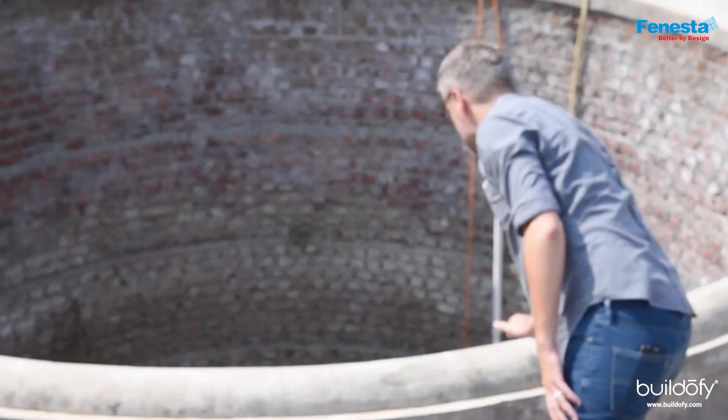One of the first decisions we made was to formalize that into an open well, not just something where we could take the spring water that was coming along, but also use that as a catchment. We implemented recharge pits throughout the site to help recharge the water table, and the more capacity we could build throughout the year to hold that water, the easier it would be on our resources.

We've actually been able to implement another massive rainwater harvesting pit that exists below the soccer field.

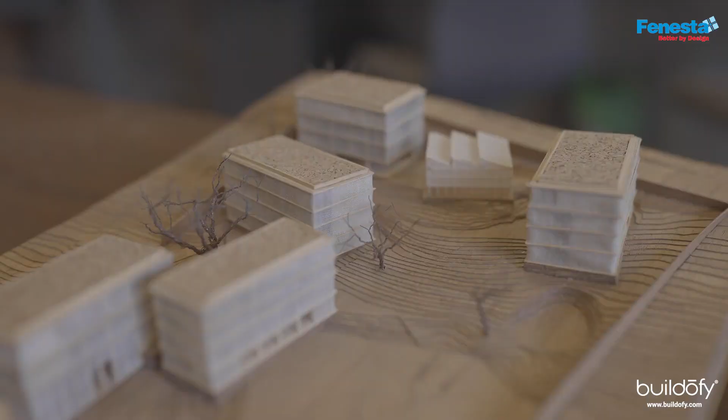What we worked out was a series of buildings that would sit, as much as possible, following the natural contours of the hill. The reason for that as well was to try and maintain as best we could the natural slope.

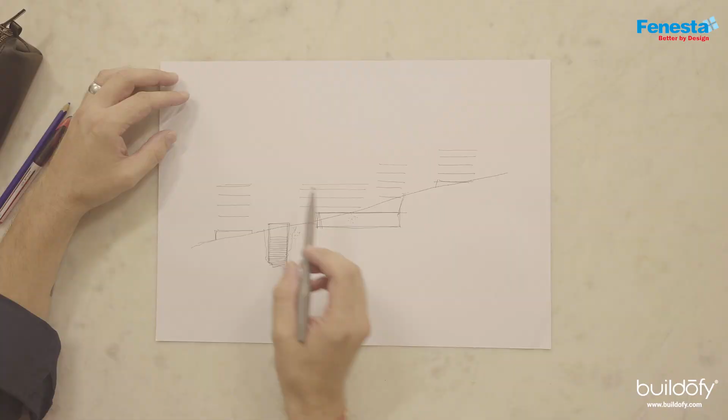Bedrock foundation of the site is fairly close to the surface, so any excavation that we had to do was quite expensive.

The aspirations that they wanted to accommodate greatly exceeded the FSI that we were allowed to build, where originally we'd planned for 9 buildings. When we took those for plan check, very quickly we were cut back to, okay, this is too much square footage, you have to take this out, you have to take this out. That's why we tried to look for ways to maximize what we could build in terms of how much of the verandas were counted in the FSI, outdoor spaces, double heights, things like that.

So there's dormitories, there's obviously washrooms, kitchen, cafeteria, things like that. And then the academic program, there's a library space that has sort of become this multi-purpose space. They play football there, they play badminton, they have poetry recitals and concerts.

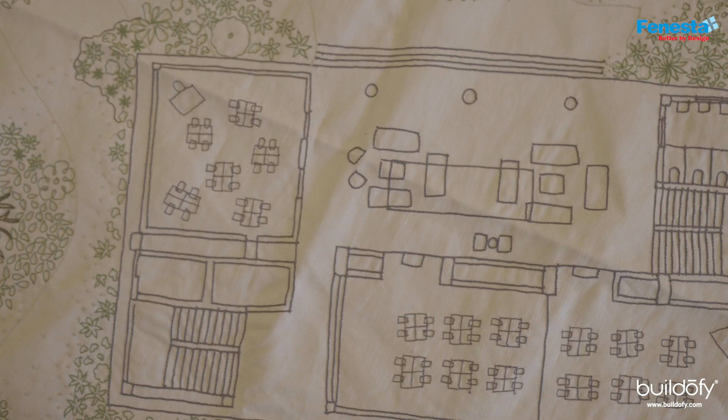The program, I don't want to say that it was conventional, but for us what was paramount was trying to maintain flexibility, to enable them to create a variety of spaces in terms of scale and function. If you imagine each of the classrooms as a cell, those are somewhat standard, but they were sort of infinitely reconfigurable.

On every building, the lower 2 floors are academic, and the upper 2 floors are residential. What we wanted to do throughout the campus was to have the dormitories and the classrooms be in every single building.

You have every part of the campus active at all times, so it's stratified vertically. A lot of the studies that we did found that the very typical campus plan is this is my residential zone over here and this is my academic zone over here, and that they never interact with each other.

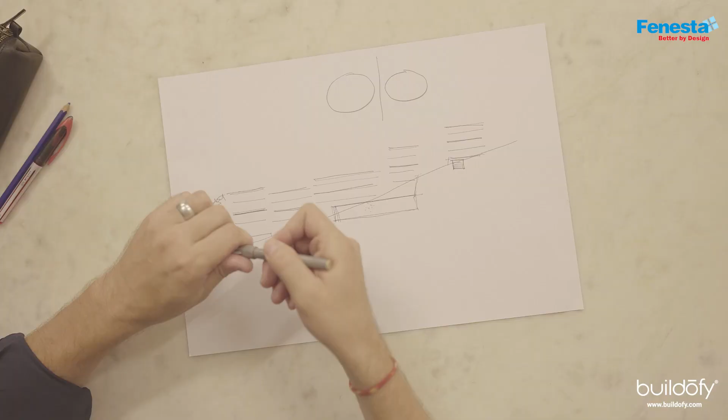In cities, when you segregate office space with residential space, the residential space in the daytime becomes a dangerous place to be, and the office space at nighttime becomes a dangerous space to be. So we wanted to try and unify those, so that at the very least in the diagram, they would stack this way. Obviously there'd be some amount of overlap, but they would be spread throughout the campus and therefore energize every corner.

Knowing that this would be the first time living away from home for most of these young women, we wanted to create a greater number of smaller buildings. Rather than have one concentrated campus with wings, we wanted to create separate ones that the girls would move through a landscape to connect to at different times. With the dormitories especially, I always joke it's the Harry Potter method, you'd have Slytherin here and Gryffindor. By having these smaller groups, the bonds would be that much stronger.

The first one we built was science, technology, engineering, math. The library is here, this is the leadership center. There's a cafeteria and some classrooms in the lower floors of this one. This one is kind of arts and humanities.

We know it is an institution, but we didn't want it to feel institutional. By having these very simple, dumb boxes with a basic column beam slab structure, it's pre-stressed post-tension slabs. We tried to make a series of modules efficient for both classrooms and dormitories, and circulation of staircases. The leftover spaces we've tried to work out as verandas.

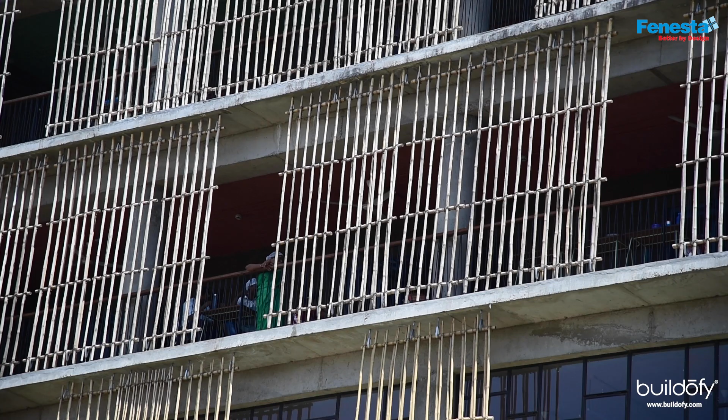We were really adamant to do single-loaded corridors rather than double-loaded, to have as much natural light as you can. The bamboo screens were a way to mitigate that in terms of shading and privacy, while still having open verandas that would connect everything and become the fabric of the shared experience.

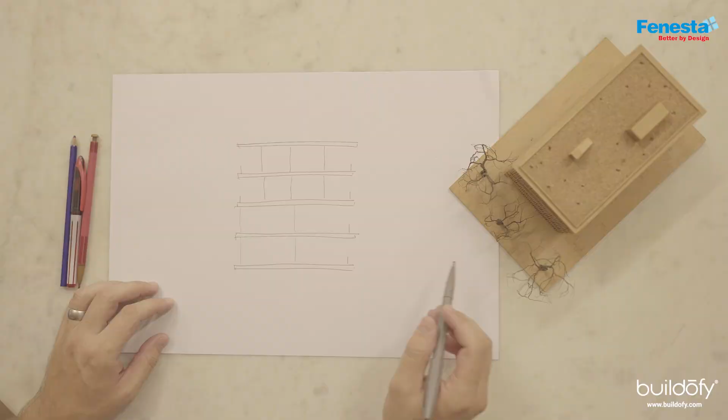The building is very basically divided into four floors. Generally on the south side we would have the veranda spaces. On the upper floors we would have the dormitories, with single-loaded corridors on both sides. Again working with the slope, this would be the downhill side, and this would be the uphill side.

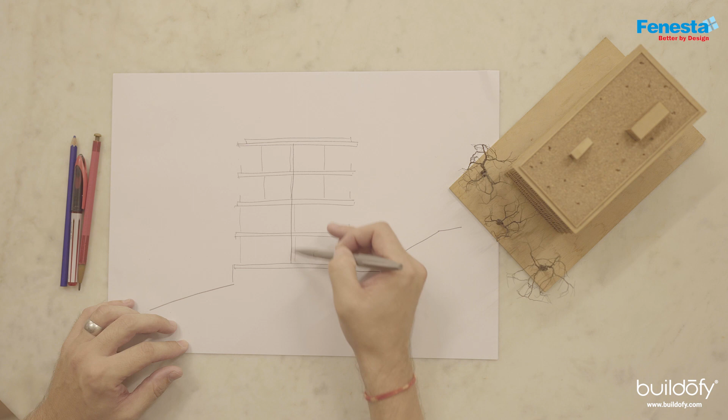The easiest way we achieved that was to take the building and split it down the middle. Rather than having columns on the outside and a row of columns in the center, we built a double wall throughout the middle of the building, which enabled us to have an open shaft for air circulation. What that effectively became was the idea of a solar chimney.

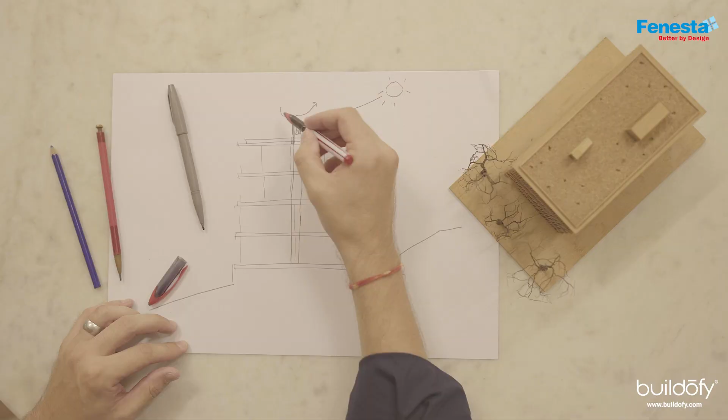The sun heats up this vertical slab that's on the rooftop, concrete on one side, and on the other three sides it's lined with glass. That creates a convection, so we have hot air escaping from the top, and everywhere we wanted to evacuate air from an enclosed space, in the dormitories and classrooms, we could just create an opening in that shaft, and that air would be drawn out through convection, pulled out from the roof.

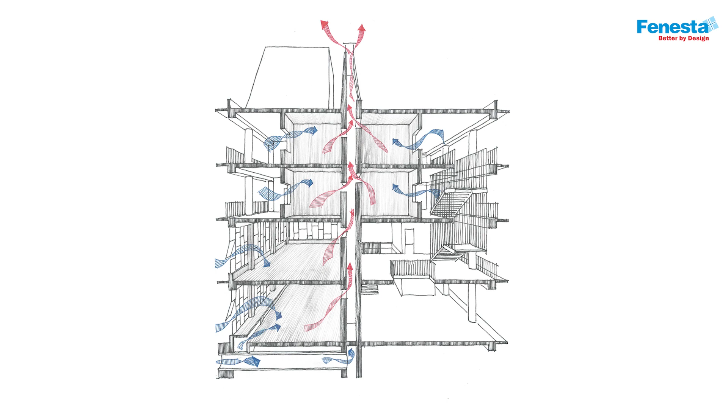Now, obviously, if we're drawing air out, we need to be able to draw air in. So at the upper levels, we created standard windows into the dormitories. All of the dormitories have openable windows with mosquito screens. And by having the verandas on the south side, you limit the solar influx, protecting your classrooms and keeping those shaded to the north side.

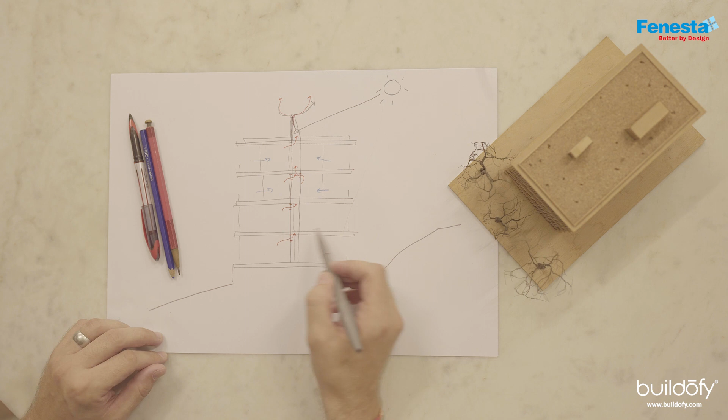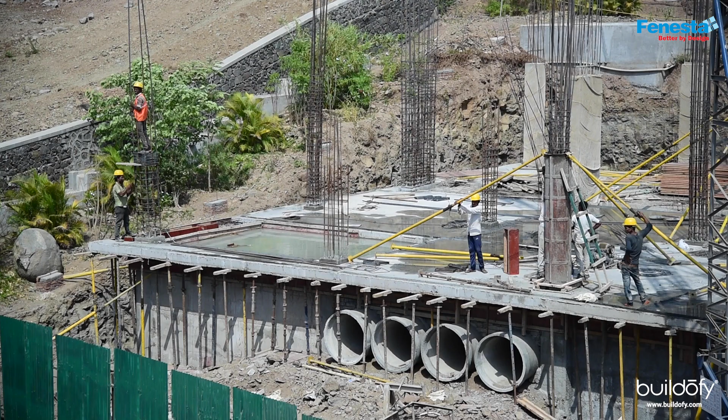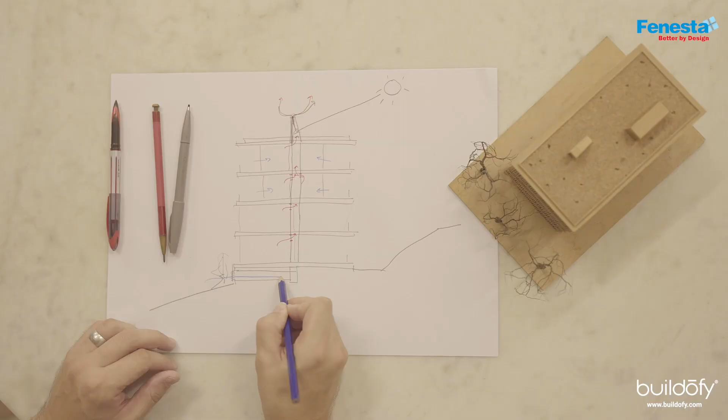Underneath the building, within the width and depth of the foundation, we created a series of hume pipes, massive concrete tubes that sit between the footings. By putting those on the north side and planting vegetation in front of them, they're shaded because of the sun direction, and they get a little humidity from the plants. By watering those plants in the morning, cool air is drawn in through those pipes. In the center of the building, it turns around and comes back. The greater length you can have, the more exposure to cooler temperatures that exist naturally in the foundations of the building.

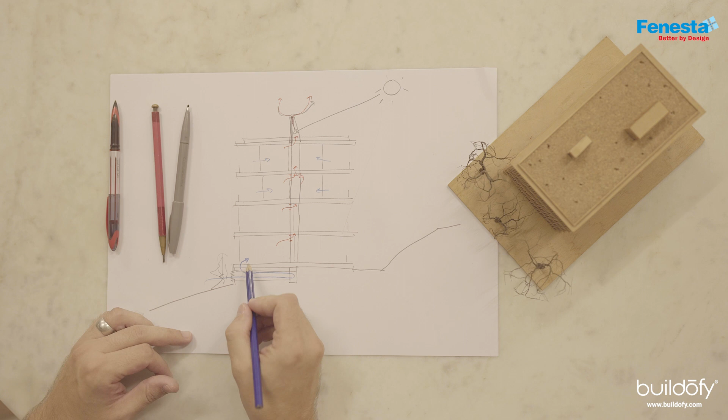The air drawn in from the outside is cooled further, and that then comes into the classroom at floor level, with standard ceiling fans in each of those spaces. We also figured out ways that on the first floor level those could come in to this side, and by having those ceiling fans mixing that air, you basically got a passive air conditioning system.

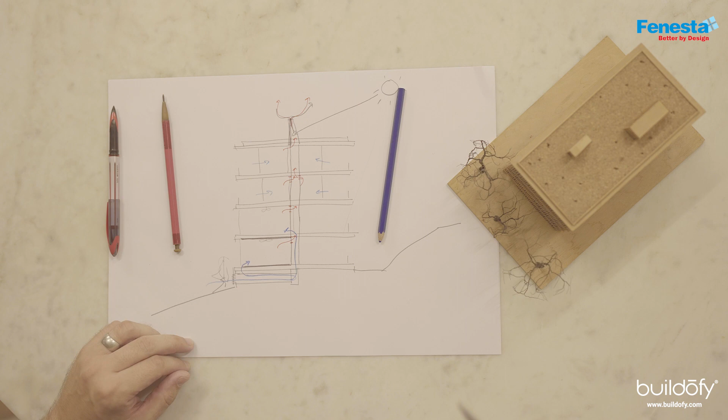What we realized also quite quickly is that if we were to leave our ceiling exposed and use masonry floors, be it IPS, cement screed, or the marble mosaics we used, the thermal mass of those two elements would create a kind of negative battery. Pune, especially this part outside the city, has a significant temperature difference between day and night, even throughout the year. By cooling those spaces off, those slabs in the floor and ceiling would have the potential to absorb heat, whether from the sun or from the students throughout the day, and keep that temperature comfortable.

The classrooms were no longer occupied. They would cool down and be recharged for the next day.

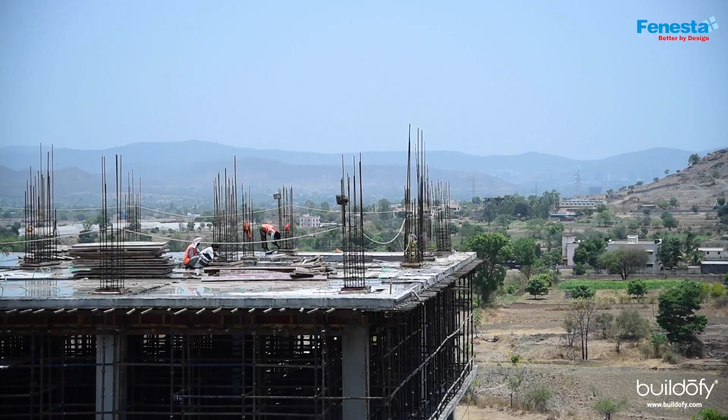Given the price constraints of the project, we knew that concrete would be something we had to live with as a material. It became the most efficient way in terms of local building technology, affordability, and the sizes and spans we needed to achieve. We know it's not the most sustainable material in terms of the air pollution its production causes, but given that everything was locally available, it just became the way forward.

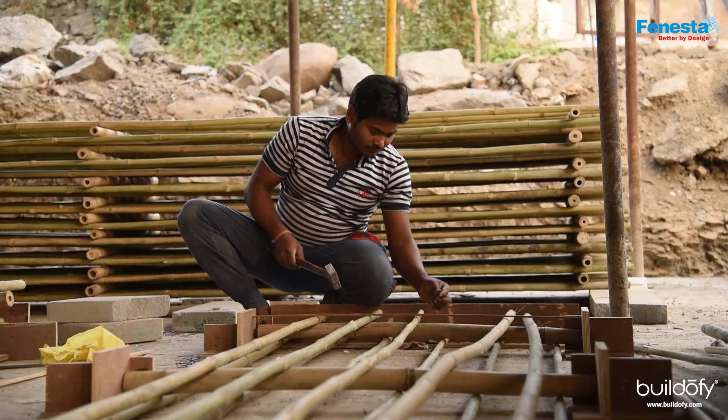To mitigate the impact the concrete had, we tried to look at more local, more natural materials. We made the bamboo screens, hand-tied from locally sourced bamboo. We worked with local artisans who had knowledge and expertise of that. Malakar Mama was invaluable in that research and development.

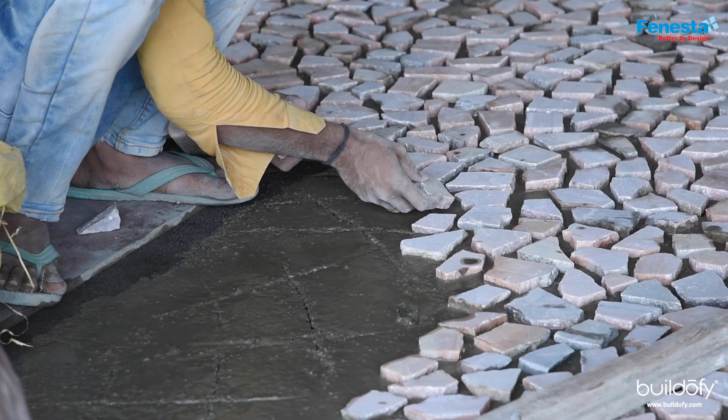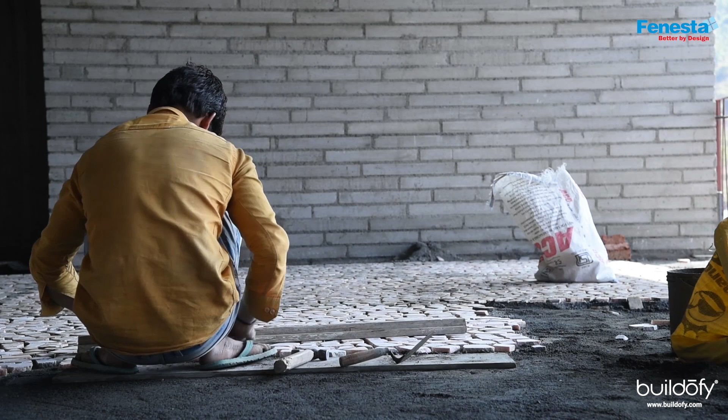We worked a lot with recycled or reclaimed material, things that were otherwise wasted, offcuts from tile shops or wastage from quarries. All of the beautiful colors you see in Rajasthan of the different kinds of marbles, we could generally get at almost no cost, or just the cost of transportation, which enabled us to invest a little more in the artisans and the craftsmanship.

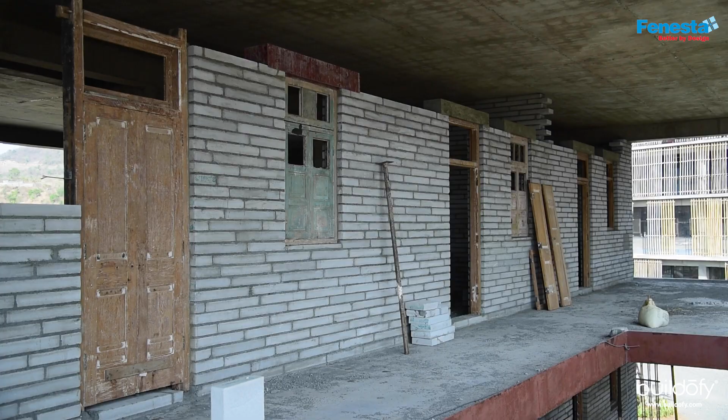The partitions for the walls are made out of recycled fly ash from industrial waste. We didn't even plaster them, so they're laid in a very careful way. Because of connections that Rupa had, we were able to get them at a large discount, and so we actually laid them horizontally, giving these broad courses, which not only looked nicer in our opinion, but also helped with insulation, both air and sound.

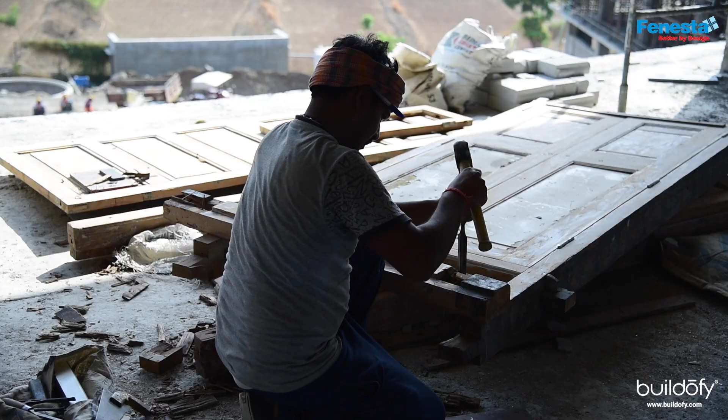We got 80 doors from an old school in Bombay that was being torn down, and the cost for that was basically the same as buying a newly manufactured synthetic composite material, aluminum and fiberglass or whatever those materials were. When you scrape off all the paint and realize underneath that it's old Burma teak from 80 years ago, it has this richness to it, this material quality. The challenge for us became, okay, how do we make all of these mismatched elements come together and work?

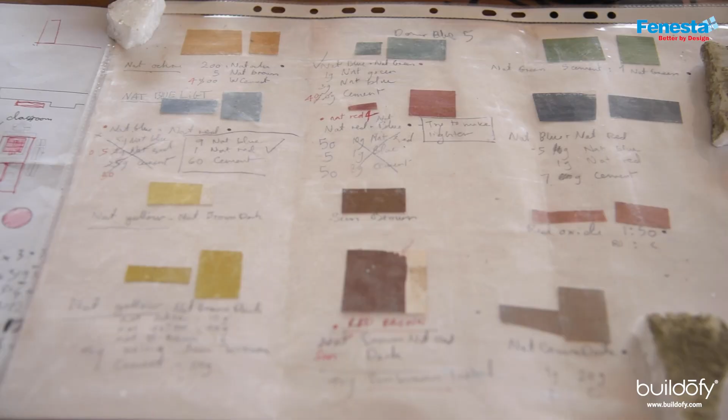The integration of color, all credit for that really goes to Milena Bach. She's the one who said, no, actually we shouldn't paint the walls. We should leave the walls the way they are. The color should be on the ceiling. And it should integrate with the landscape, and it should be a kind of wayfinding device, and it should give a sense of place so that no two spaces have the same palette.

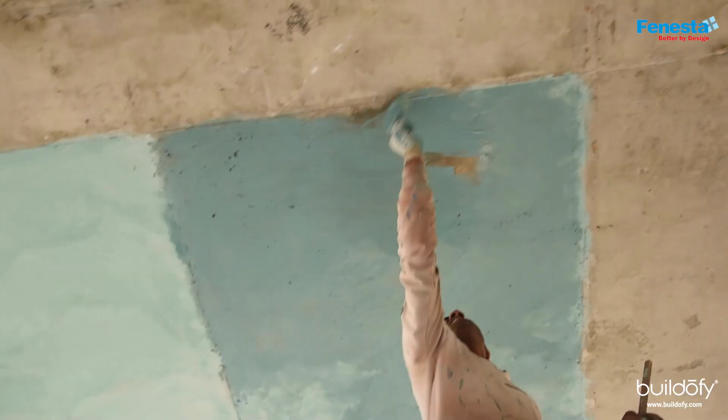She came here and worked with Dwani, who was an architect on my team at the time, and they developed, using local pigments, oxides, and things we could get in the market here, their own kind of paint. It's basically pigment, cement, water, and a series of binders. It's kind of a material unto itself, so it has depth, thickness, and texture, and the girls have really responded to that.

The furniture was something we knew had to be flexible, durable, and robust. We wanted it to bring an element of color. Paint would be something desirable in terms of color, but also an affordable finish on the steel.

We wanted them to be lightweight and transportable, so two girls could easily pick up and move a table. We tried to design them so they could fit together in clusters of 3, 4, 6, whatever. You could make them in a row, in a circle, or take the sort of nominal Roman camp version of students in a row.

We wanted to create a series of benches and chairs for the library, using a reclaimed material. We found in Panipat in the north, where there's a lot of textile industry, places making threads and ropes out of industrial waste left over from weaving. You can get these same ropes made out of things like potato chip wrappers and cellophane. We looked at outdoor furniture using these too, since plastic would perhaps behave better. Paul Michelin, a designer who worked with us, made these beautiful long benches with a wooden plank at the base and a woven back.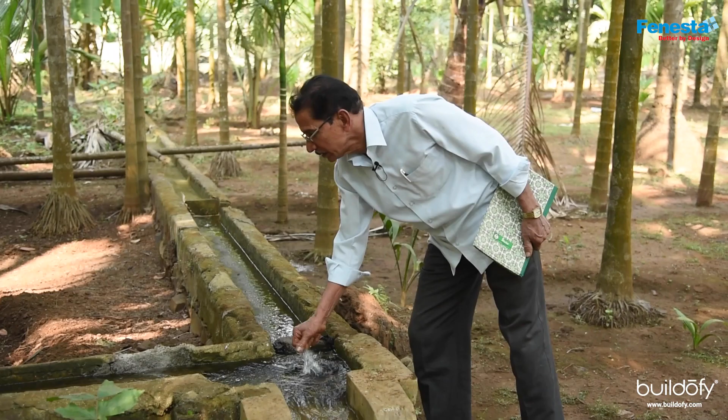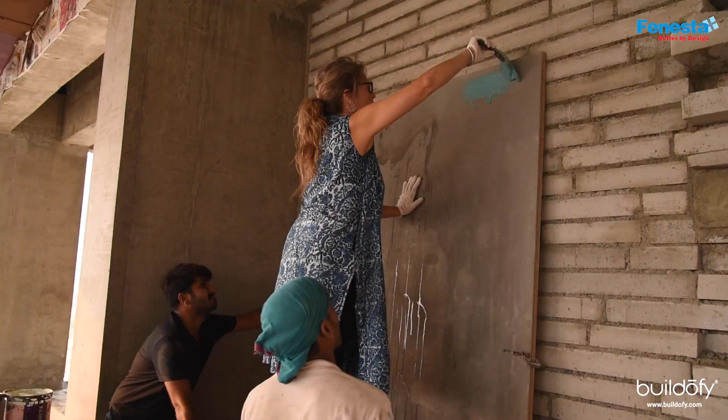My preconceived notions about the power of collaboration and its potential have just been unwaveringly reaffirmed. When you come to people with an idea, a program, a project with the kind of potential something like this has, just the sheer idea of a place like this was inspiring in and of itself. People were lining up to work on different parts and elements, from contractors coming with ideas beyond their roles and responsibilities about how we could save money or do something better, more efficiently, more productively, to people like Malena and Pratik. We engaged with local farmers, we brought permaculturalists from Zanzibar, Emira Nakashima. All of these different characters contributed something that goes way above and beyond what we as architects could even imagine for ourselves.

The first year, in another part of the valley, we created a small annex where the first batch of girls started, just 3 simple classrooms in an old manager's building. But once the first building was ready and the girls came on campus, the whole space kind of came alive.

You can do what you want as an architect, but until it's inhabited in a rich and meaningful way... the light and energy that these young women have is incredibly inspiring. And Rupa kept asking for this sanctuary for learning, and I hope we've created a foundation for that.